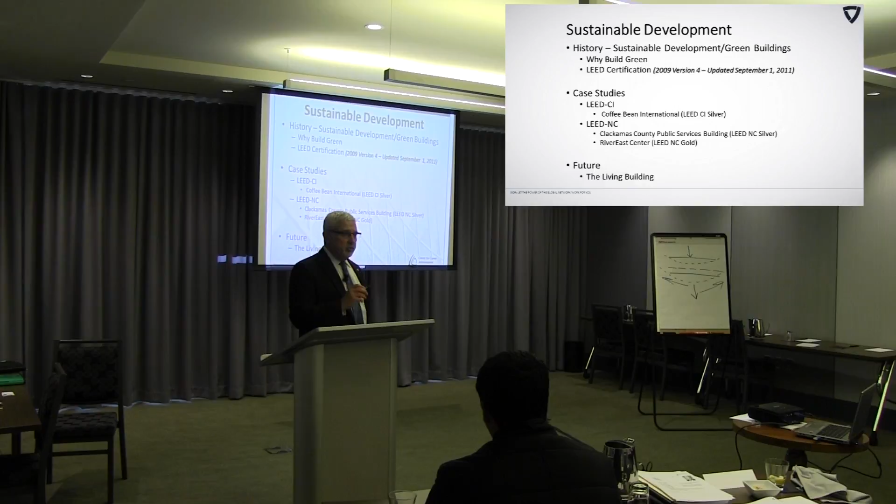So where were you on April 22nd, 1970? When I ask this question, the normal answer is I wasn't born yet. So if you're not sitting in the very last row of this room, just to the right of the doorway... 1970, how many of you were not born? You disgust me. All right, we're done, we're going to go drink now. I was 3 years old. You were 3 years old. Okay, Luis, you're in the club. 1970, yeah, we were almost in college by then.

This is Senator Gaylord Nelson, April 22nd, 1970, giving a speech in Denver, Colorado. What do you think the significance of that date is? Anybody know? The significance of April 22nd... still celebrated today, Earth Day.

Earth Day, so I remember Earth Day when we were kids. Well, I wasn't a real kid in '70, I was almost an adult. And we'd go out and do newspaper drives, can drives, all kinds of things. Earth Day, and the history of that is, there's a little bit of significance, but it was basically the start of the EPA. So in 1970, in December, just 7 months later, the federal government created an agency which still exists today, the EPA, based on the speech and the creation of Earth Day.

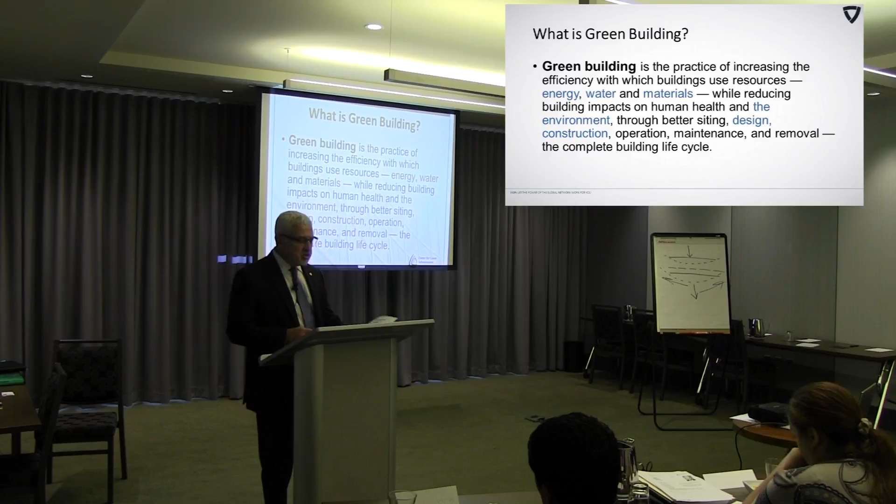Why build green? Well, I think we could answer that easily. Environmental benefits - we want to enhance and protect the biodiversity system, improve air and water quality. I don't think anybody could argue any of these points. Reduce waste and conserve and restore natural resources.

But one thing I think you're going to find is, everybody in the room except Luis raised his or her hand, weren't born in 1970. You're of a generation of a different level of consciousness. I think your generation sees the world from a totally different perspective than my generation, and especially much different than the generation before mine, where the generation before us was the build generation - we're making everything. Our generation has been a little bit more the accumulation generation. Your generation has more tendency to be socially conscious and aware of what the future might hold. For example, making decisions on what you buy based on how it was made. I see that - my children are 25 and 27 years old, and I know they think about things before they just go onto Amazon and buy stuff. It's like, well, where did that come from? How was that made? What's the products that go behind it? How are they polluting the world? But, you know, I never thought of that - I just went down to the store and bought what I wanted.

Economic benefits. Obviously, there's a reduction in operating costs, and creation and expansion of markets for green industry. That's huge. Take LED lighting, for example. Five years ago, was there a market for LED lighting? No, but there's been a demand for more efficient lighting products. LED comes on the market. It's initially more expensive, but it gradually offsets that through energy conservation. You put an LED light bulb in, it lasts as long as fruitcakes.

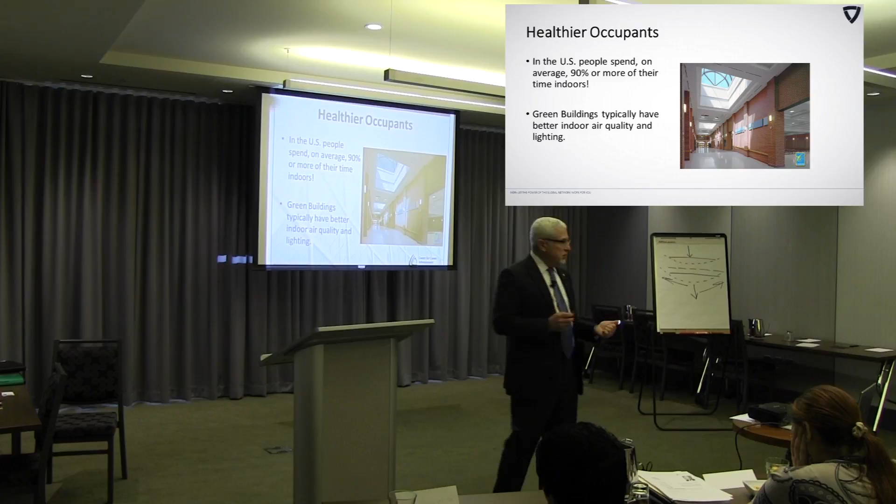Interesting statistic: on average, 90% of the time people spend is indoors in the United States. 90% of our day is inside. Green buildings typically have better indoor air quality and better lighting, creating a better work environment, living environment, a more healthy environment for all of us.

Walmart found that stores with natural lighting, especially skylighting, had a 40% increase in sales over stores that did not. So there's a direct correlation with how you feel to how you spend.

Herman Miller showed that they paid for their daylighting in 2 years through worker effectiveness. They measured the effectiveness of their workers, the production flow, and so forth. Productivity increased enough to offset the cost of improving daylight quality in their manufacturing facilities and their headquarters office. It paid for itself in 2 years.

The Mahone Group said that workers in their call centers process calls 6 to 12% faster when they had a view outside. So in this room, imagine this was your office, and we closed that drape where Bob's sitting, with no connectivity to the outside. Would your productivity be very high on a regular basis? It'd be pretty depressing, wouldn't it? Yeah, I would think so. More so if you had to listen to me every day, dude.

Attract and retain tenants. I think this is a great one. Turnover dropped 50% below the typical level at a PNC by attracting and retaining the employees that work for your company. So a great benefit to a tenant is employee turnover.

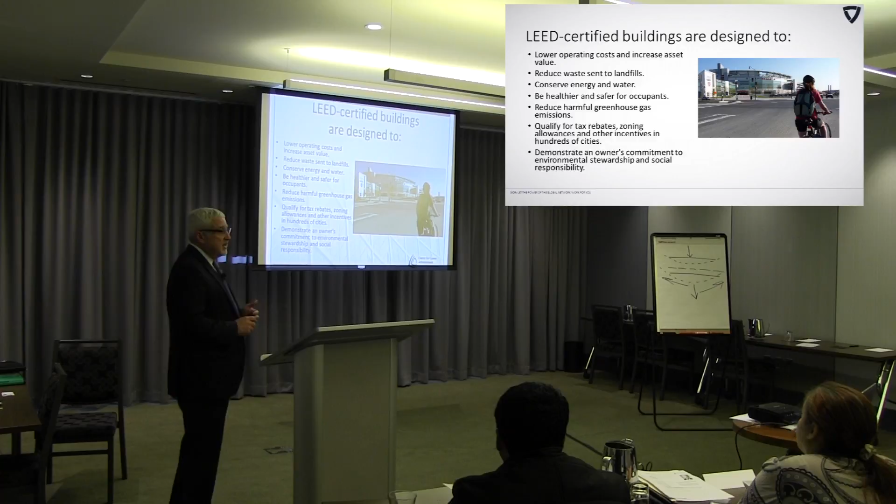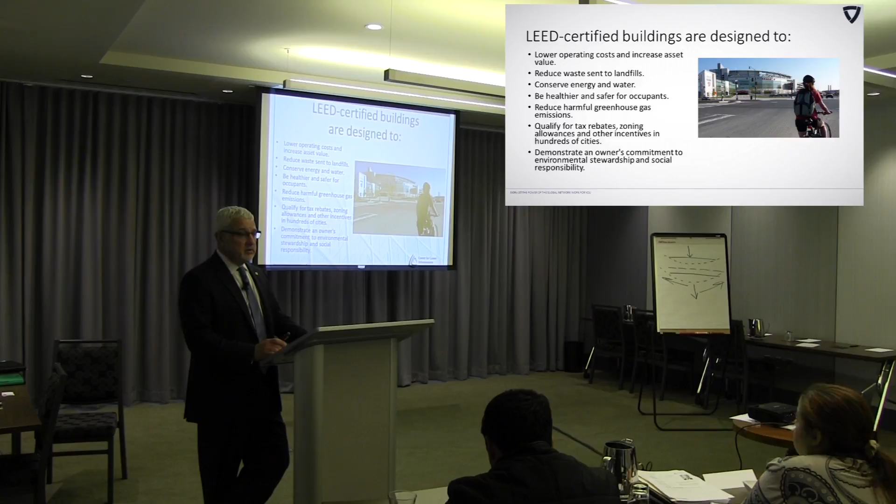Washington D.C. National Stadium - one of the ways you can get LEED points is valet bike parking. So if you ride your bike to a ball game at National Stadium, they have valet bike parking. True story. I don't know what they charge for that, but I'm sure they charge for it. They got LEED certification points for doing that.

People, environment, economics. I want to move forward because I have a couple of things. Creating and preserving value - obviously we talked about that. Lower cap rates, achieving top market rents.

You guys are all brokers, leasing space, representing tenants. Will a tenant in your market pay more for a LEED certified or sustainable building than not? Especially office brokers - Bridget? I don't think in our market, we've had such devastation on the office side, I don't think people really care. But from a cap rate standpoint, yeah, if you lower expenses you increase your NOI.

So you're adding value just by doing it. Will the tenants pay a little bit more? Maybe, I don't know. I'm hearing stories from office brokers around the country that say that if you're not LEED certified, you're probably not going to be able to call yourself Class A.

So all of a sudden your owner is going to go, holy cow, I built this great building but I'm not Class A. I don't know, might be coming. Ryan, did you have a thought? No, they wouldn't pay for it industrial. No, I don't think so. But industrial companies sometimes, like we talked about Honda, love that market differentiation.

So is it about the cost? I don't think so. I think it's about the value.

So I've got a couple of case studies I want to go through, and then we're going to have questions if you have any. And as most classes do by the time we hit 6 o'clock, have none, because you want to go have a party. So that's what we're going to do. But I'm going to go through a couple of quick case studies.

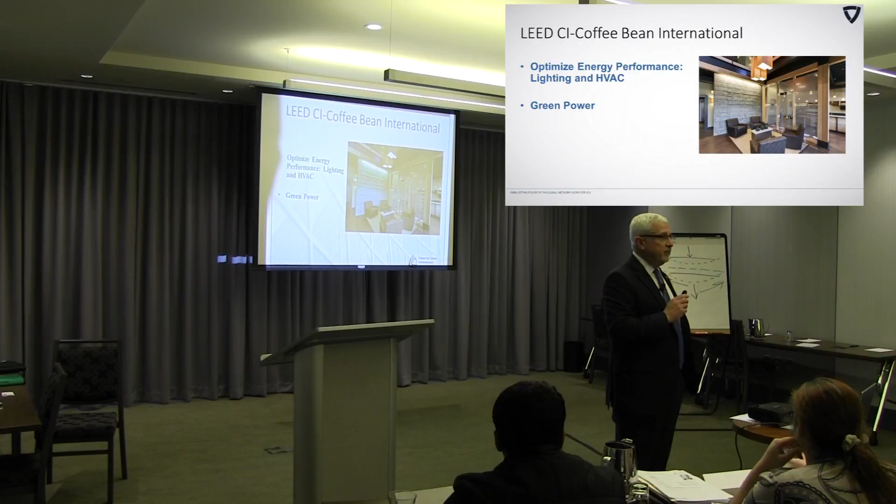Huge points for that. Lighting, obviously, having systems where lighting naturally goes off under a timer or a motion sensor - you walk into the room, lighting goes on, you walk out, a few minutes later the lights go off. Also a sensing system that says when there's a certain amount of natural light coming into the space, a sensor either dims or turns off the interior lighting. It might turn every other fixture off because you have enough natural light to provide the minimum levels you've established.

Building was under a long-term lease.

We had construction waste management - here's another great example of how we can create LEED certification points. What do you do with the waste materials of a project? In this case there was a lot of demolition, so we used the aggregate that was cut up. When we cut new windows in these concrete walls, we ground that up, and that became the aggregate for the concrete we needed to pour back on the site. So it was recycled right back onto the same site.

The office building across the street from my office downtown that's under construction, the 30-story building - the block that building is going up on a few years ago housed 6 different buildings, multi-leveled, everything from 4 to about 8 stories of old poured-in-place concrete type buildings. All that concrete and steel was ground up and is back into the new building now as new material. Pretty cool.

IAQ, we talked about that, indoor air quality. That's a huge factor in creating environmentally positive, desirable spaces for our tenants to occupy. Indoor air quality versus natural ventilation versus mechanical cooling - tremendous opportunity to create points for LEED certification.

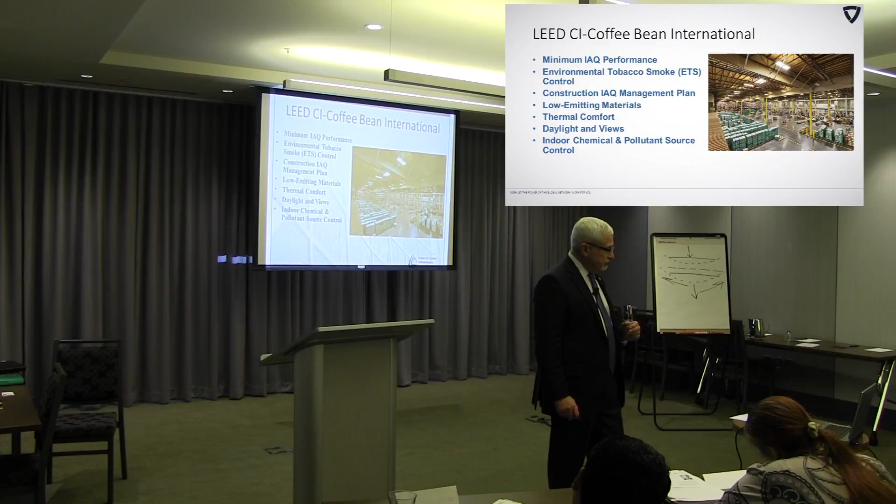We talked about daylighting and views. This next project is the Clackamas County building, and it achieved LEED Silver. This is a government building developed by a private developer, happened to be Greg Speck, the same guy I represented in several projects. This was on a site that was a brownfield.

So we had brownfield redevelopment. Everybody know what a brownfield is? Anybody not? Environmentally contaminated site. So we had to take a site that was basically out of circulation, off the market, go through a remediation plan and figure out what level of work needed to be done to create a buildable site void of environmental contamination. That's a brownfield.

Big points for that because you're taking a site that's basically sitting fallow in your market, doing nothing, not producing revenue, not paying taxes, not creating any environmental contribution whatsoever, and you're returning it back to the world. So you get some points for that.

Alternative transportation. Portland is known as the light rail capital of the world. We have tremendous leadership, I think, in our transportation system. Basically, it's a great opportunity for the homeless to get out of the weather.

It hasn't taken anybody off of our freeways or roads, but I kid, kind of.

Reduce site disturbance. When you're building a project next to an environmentally sensitive area, like a slough, a wetland, or a marshland, instead of coming in with trucks that go everywhere and do whatever they want, you create a plan that minimizes the impact on the surrounding property.

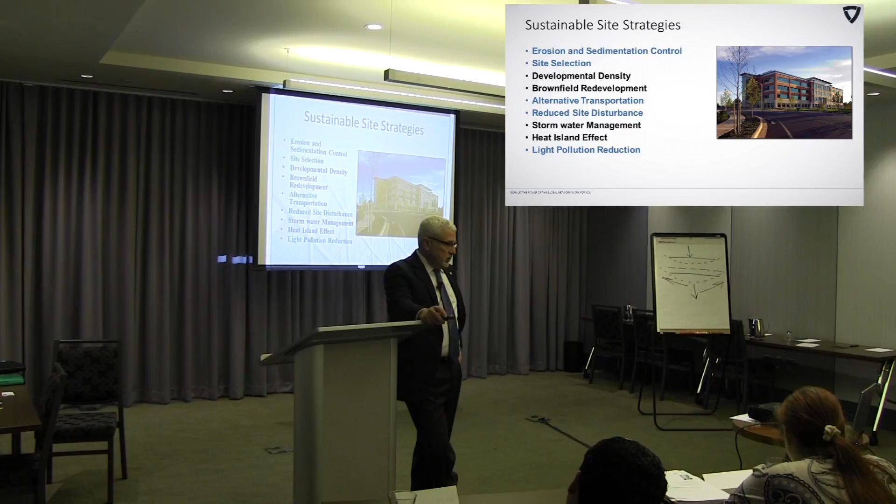In some cases it's positive, in some cases it's negative, and you can control that. If you want to use that heat in a productive manner, you can.

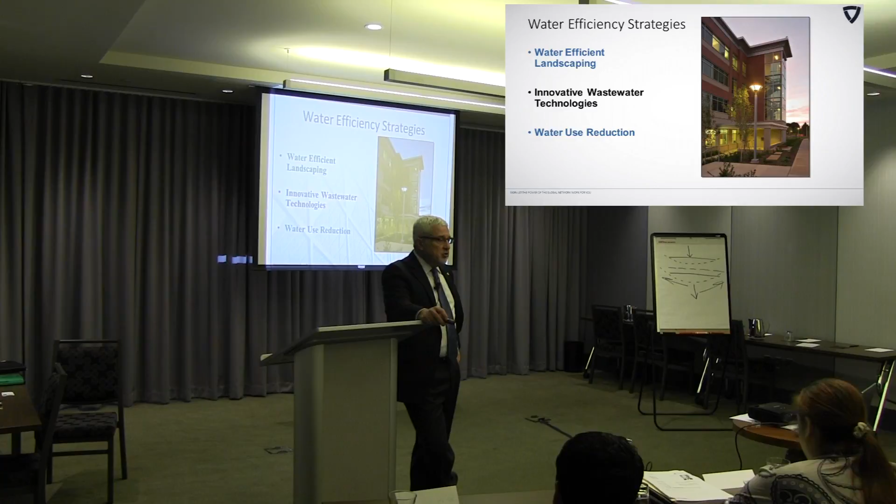Water efficient landscaping. Once again, we create systems that retain the rainwater off of the roofs. It goes into a cistern and is then used to irrigate the landscaping. It can also be used for wastewater. You can use rainwater as gray water.

Energy, natural lighting, fundamental building system commissioning. In this case, you can see we've got some shading devices on the building that reflect the sun at certain angles. We want to maximize penetration during the winter, minimize penetration during the summer. I'm going to show you a really cool example of that in just a few minutes.

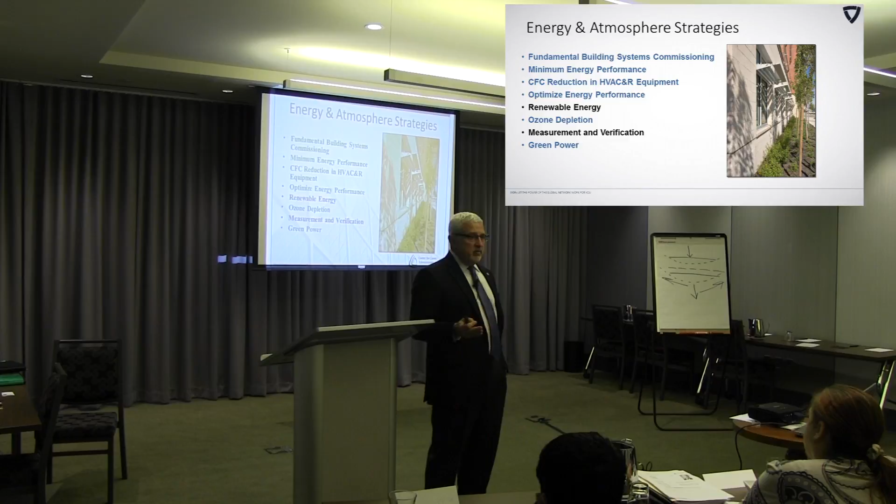Checking a box on your power bill. You ever seen that? You get your statement from your power company that says, would you like to receive green power? Anybody get that? Yeah, for an extra $15. You pay a premium, right? So you pay a premium to help the power companies produce manufacturing facilities, or whatever type of source they can, to get away from environmentally harmful methods of creating electricity.

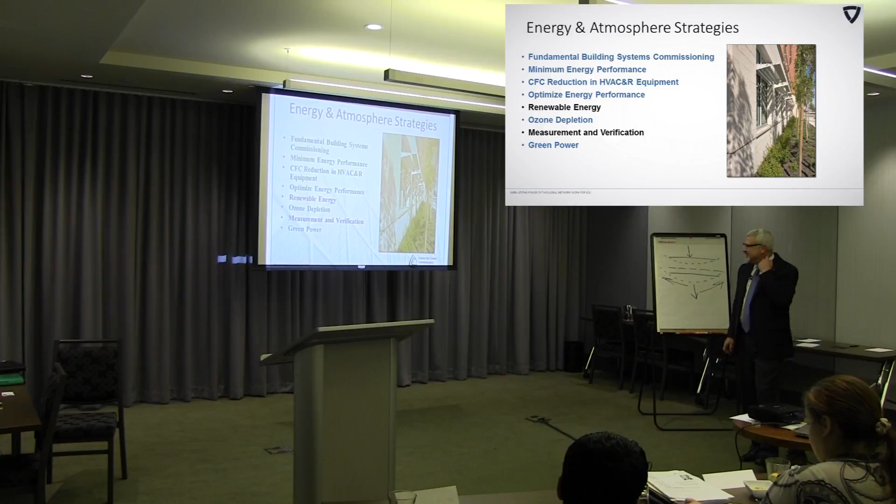Wind, solar, etc. You can check the box. I don't think the wires actually know where the power is coming from that come to your building, but you're helping the power company do that. That's marketing, exactly.

Storage and collection of recyclables, we talked about that. Building reuse.

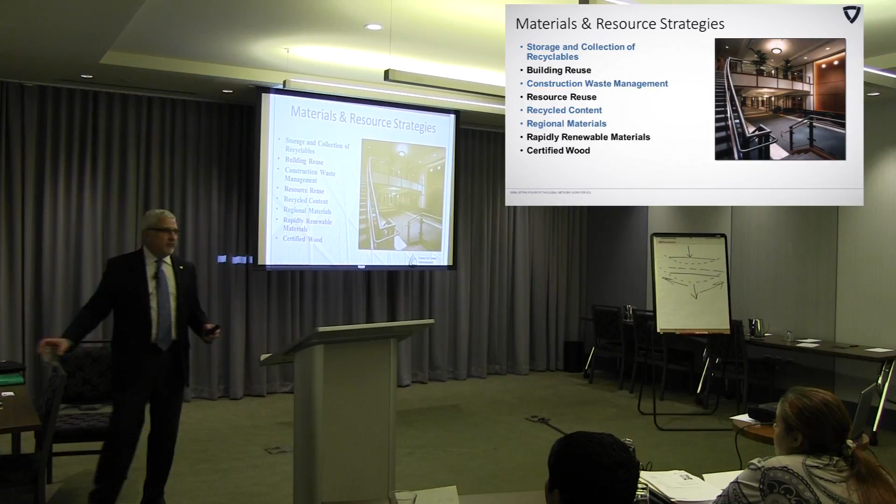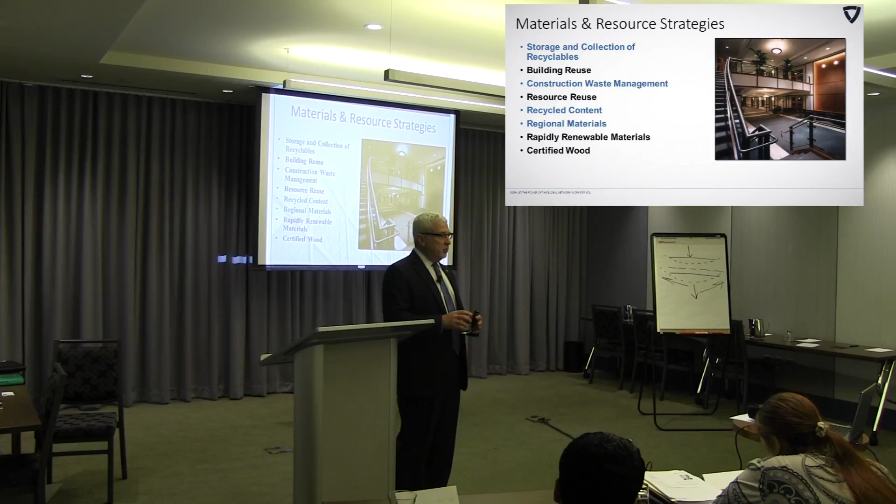We talked about indoor air quality, big event, daylighting. So we had innovative strategies, a LEED accredited professional. One of the things you do to get LEED certification points, which is kind of cool actually, is you develop a documentary film about the project itself that then goes onto a DVD and sits in somebody's drawer for the rest of their life.

But you got LEED certification points for doing it. Not that I'm cynical. So here's what happened on this particular building. This is a financial analysis, speculative, because you're looking into the future of what might happen based on the things you did to the building. The annual baseline energy costs were $190,000.

Annual energy savings by the sustainable methodology we put into this building, we estimate at 35%. So a 5-year savings at that number, 300 grand. Appreciated value based on a 7 cap of that savings. Bridget, we talked about that.

Guess what? You lower your operating costs, you own an office building. Where does that differential go? NOI. Wow. I'm doing an energy efficient building. It's costing me a premium, but I'm increasing my NOI by a 35% margin on operating cost savings. Capitalize that at 7%, I got a $953,000 increased value.

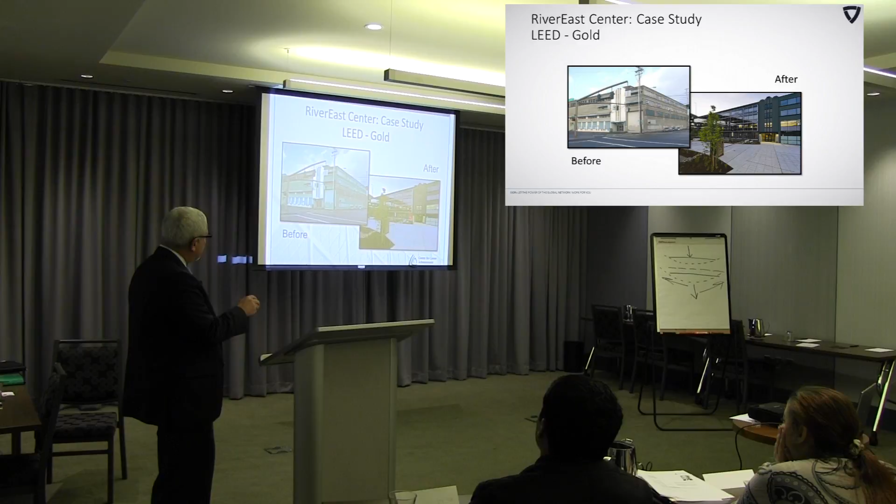This is what it looks like today. This is the same opening right there. This is the entry - they actually replicated some of the same look as the main entry of the building.

So as for sustainable site strategies to build their plan to get LEED certification, here are some of the things they did - obviously using a LEED AP professional. This building, by the way, is owned and occupied by an architectural engineering company, so they were really into this. Not only was this going to be their new home, but this was their showroom for future customers. They had multi-dimensional motives for doing this - these guys were architects by nature and socially conscious, always thinking of ways to improve the environment and build better, more efficient buildings. That's just what they do. But in this case it's also about showing future customers how great they are, so there was market differentiation in making an advertisement out of their own building.

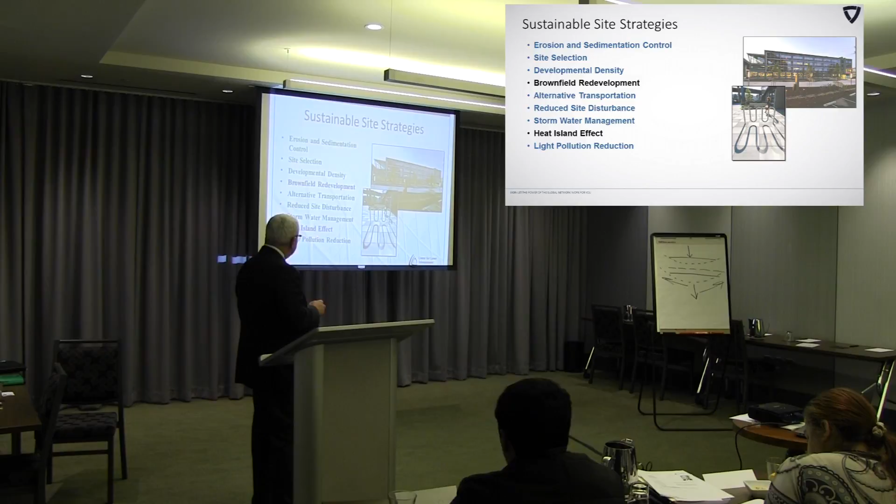Brownfield redevelopment - this is right along the Willamette River, across from downtown Portland, in an old industrial area where there's lots of contamination. We're on a bus line and light rail line in this area, so alternative transportation, stormwater management, heat island effect, and light pollution reduction. You can see bike racking right here.

Here we have an area that's architecturally kind of cool. This is collecting rainwater off the roof and running it down to an area that goes directly into the property's landscape system. So we're taking rainwater, not letting it go into the stormwater system - we're putting it out into the landscape where it will percolate and naturally find its way into the water table.

One of the cool things here is this solar wall. This wall is basically a double layer of glass with shading devices. The sun has different angles depending on the time of year - it's higher in the sky in summer, lower in winter. So we want to maximize penetration when we want natural heating, and minimize it when we want to keep the building cooler. We've designed these shading devices to mostly address the angle of the sun.

The other thing you see in this picture are trees - deciduous trees. Deciduous trees lose their leaves and harvest sunshine. So we're creating shading in the summer with the leaves on the trees, and solar penetration in the winter when the leaves are off. Pretty smart. So here's how this solar wall works.

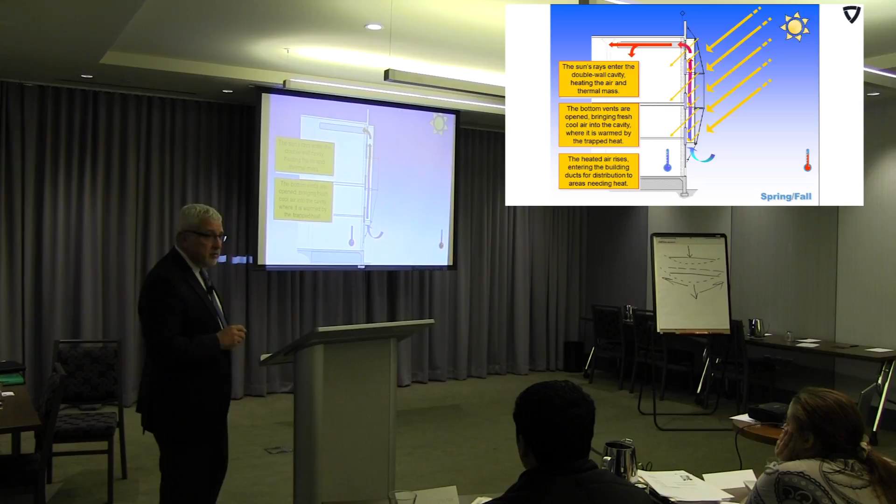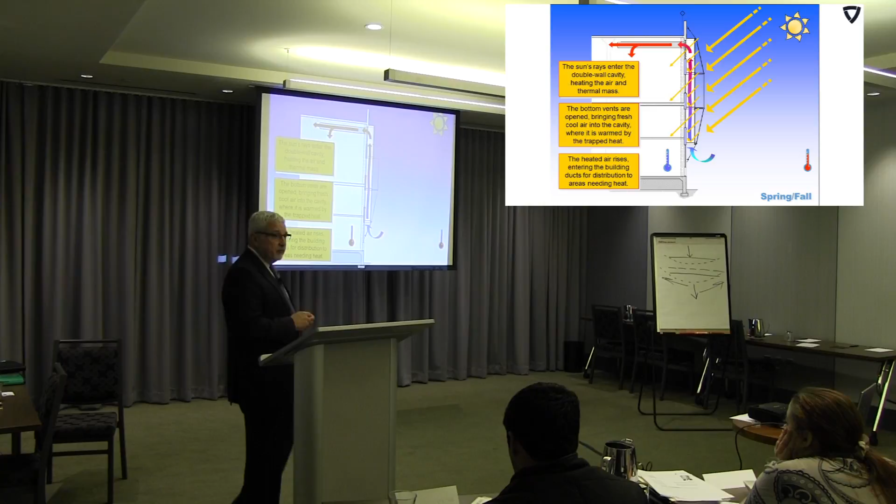...when we're trying to maximize thermal mass heating. The sun's angle is such that we let the sun penetrate, warming up the slab and the wall. The bottom vents - this glass cavity is vented top and bottom. What happens to air when it gets warm? It rises - that's natural convection. We have natural convection going on in this cavity. As the cavity heats up and the surfaces heat up, we open the bottom vent and it sucks fresh air into that vent, and in wintertime we open a vent here and it sends that hot air into the building.

Now for the next condition, when we're trying to keep the building cooler, the angle of the sun's rays are reflected and deflected off the solar shading devices. It does heat up the external wall, so we have a thermal mass where the air is trapped, and we bring fresh air into the cavity. By natural convection, the air rises. We open the vent at the top of the wall, and it sucks air from the building into the cavity and flows out. So you open vents on the north side of the building where there's cooler air, and it creates a negative pressure through this convection wall, sucking air out of the building and creating natural ventilation.

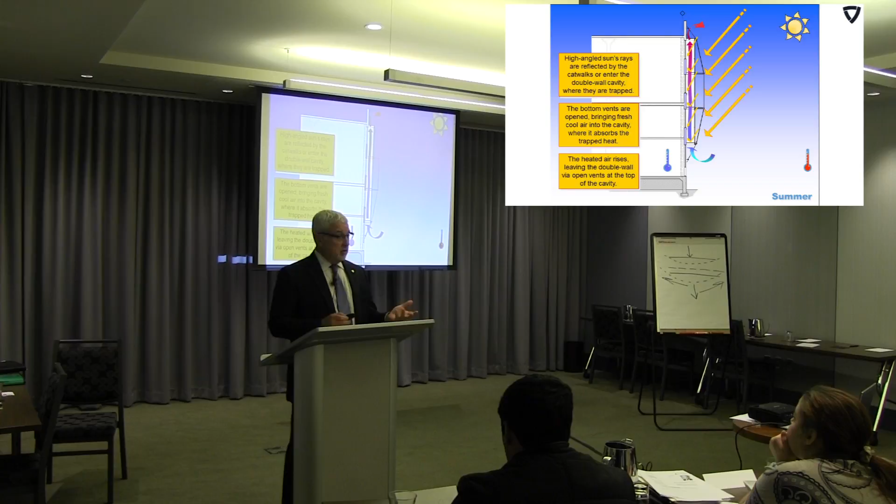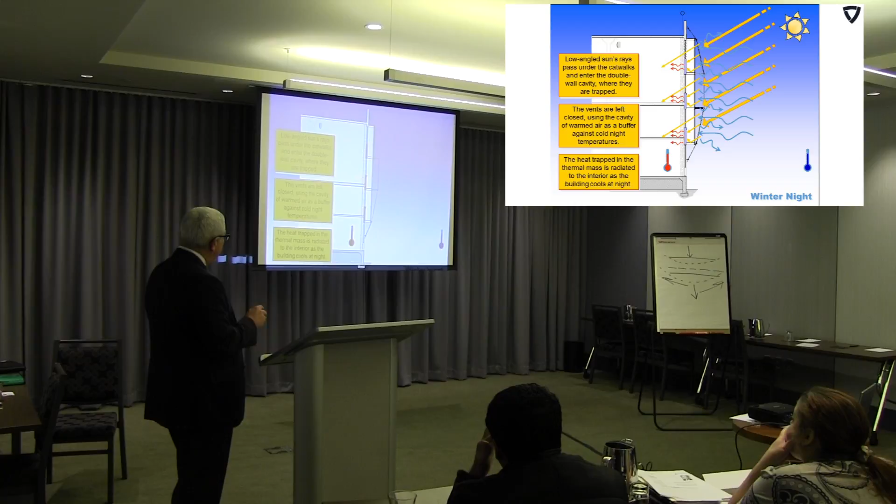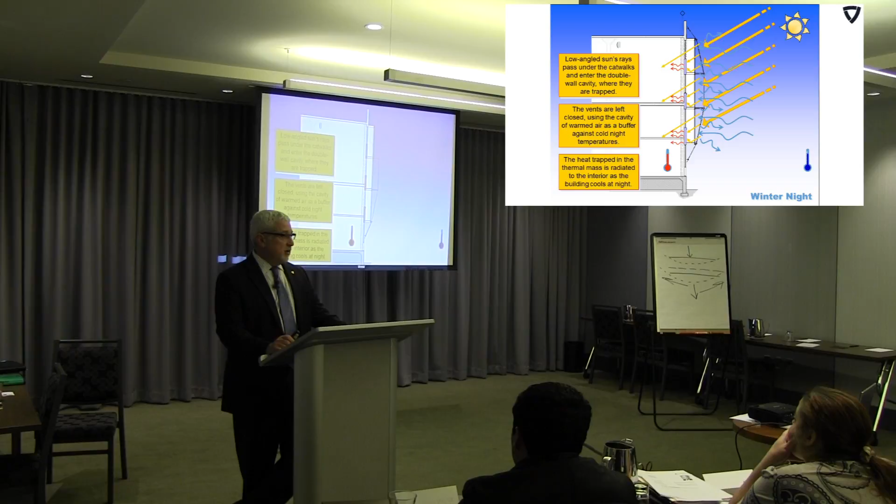And the last one is in the winter, we want to trap air in the cavity. We want to close the vents and let the warm air buffer against the cold night temperatures. These become thermal masses that radiate heat into the building at night, so in the morning when you come in, you don't have to crank the furnace as high and rely on the mechanical system. It's naturally being heated by the radiation from the thermal mass.

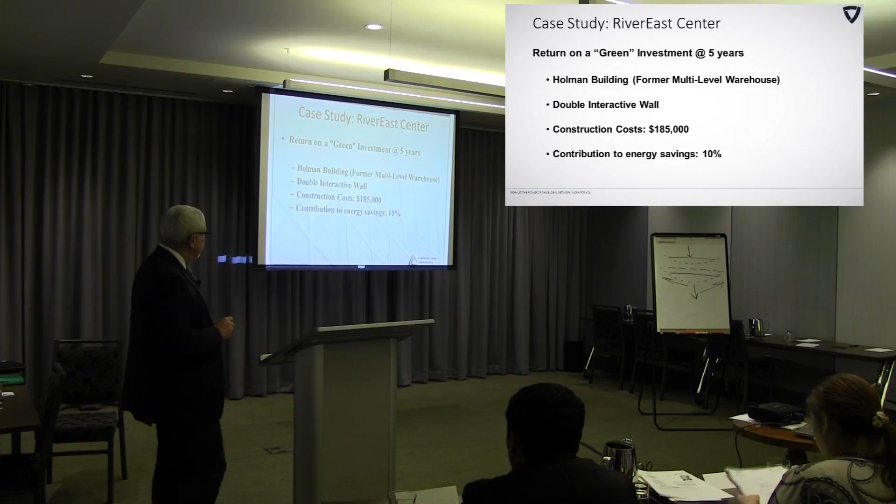So let me get to the financial analysis on that real quick. The construction cost of that wall was $185,000, and we assumed it would contribute about 10% to the overall energy savings of the building. Here's our annual baseline cost, once again about $1.75, 10% of that.

Here's our 5-year energy savings, appreciated at a 7 cap, $262,000. Here's our cost, here's our savings, here's our increased value, net value gained, 91.9% over 5 years, or an 18.4% return. I'm going through that quickly, but the math is accurate.

It's proven to be an incredible feature for this building, and the architectural engineering firm, the people who work there, love it. It's just cool space, and it's different. It's unique. It's a conversation piece as well as an energy-efficient solution in design.

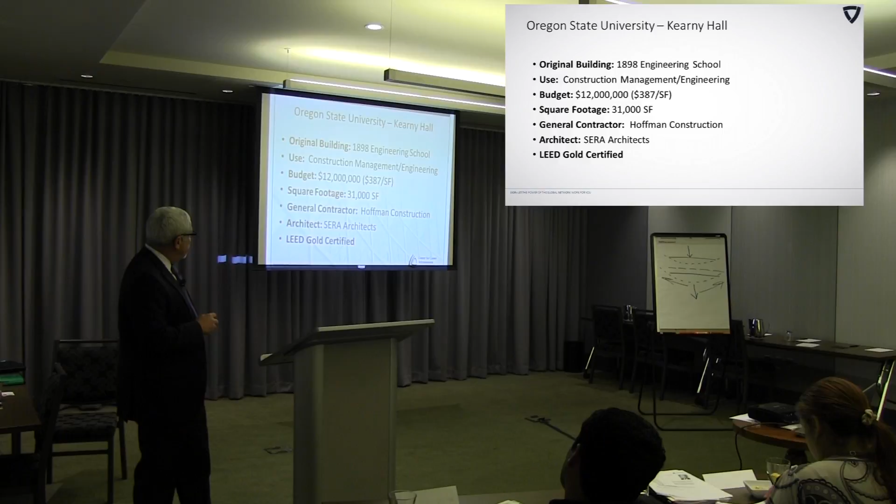This was an old building at Oregon State University for the engineering department. They had a budget of $12 million to renovate this entire building, 31,000 square feet, with complete demolition of the interior to create an environmentally sustainable building and seismic upgrades to allow continued occupancy.

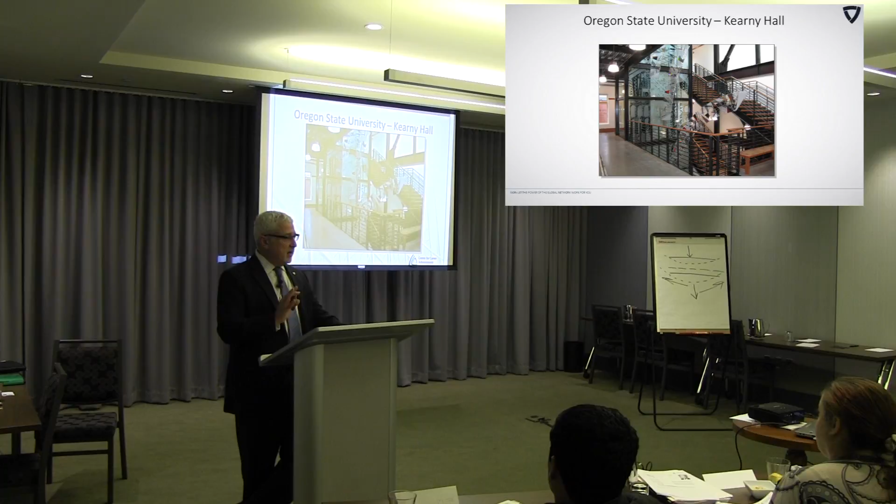Sensor controls save about 30% of energy—rooms that aren't occupied, systems go off, and come on when you walk into the room. 75% of the construction debris was targeted for recycling back into the project. Sustainably harvested wood, operable windows, air quality improved by minimizing VOCs, which come out of tiles depending on materials used for flooring and wall coverings. It eliminates VOC penetration of the building.

Here's what it looks like now. The renovated structure is a teaching tool for students. It's really a cool study—the bones of the structure and the bones of the mechanical systems are visible.

This is just a real quick time lapse, if it will work. Sometimes it works, sometimes it doesn't. This time it looks like it's not going to work, which is fine since we're close to the end anyway. But it's basically a cool time lapse of the total demolition of the interior and then the rebuilding of the building.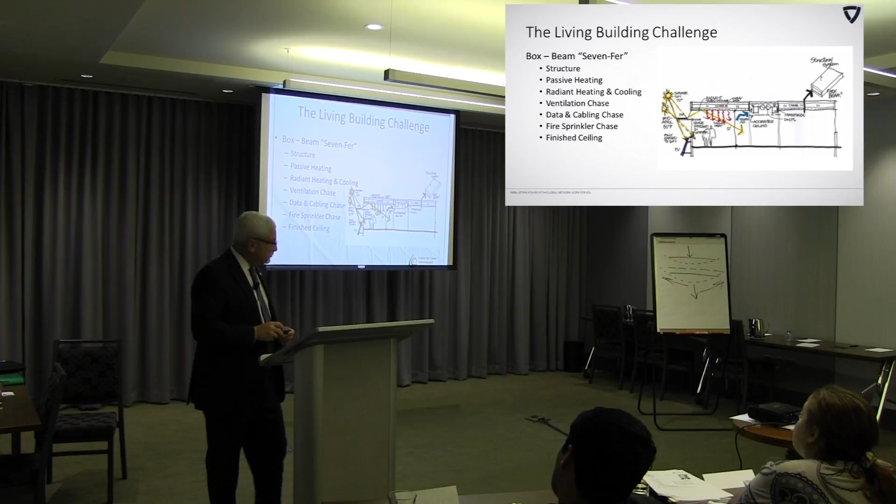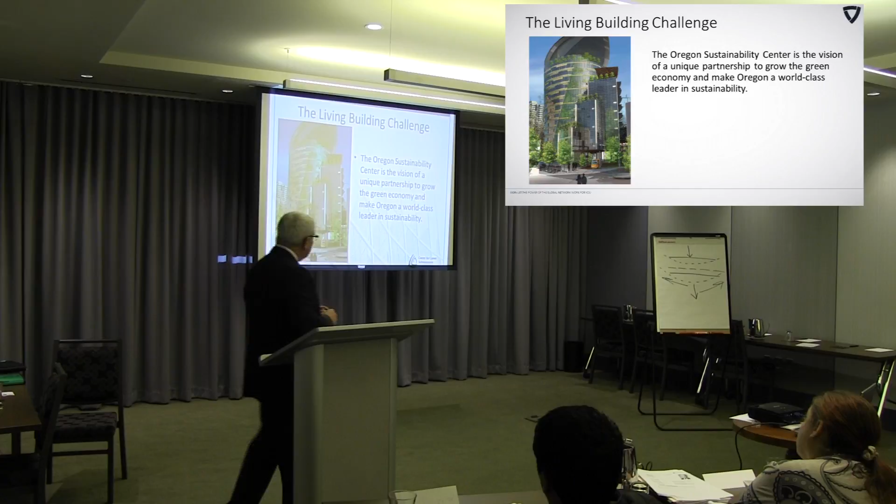Gathering rainwater—this is a graphic model of the Oregon Sustainability Center, which is going to pursue the Green Living Building Challenge, net zero from day one, from construction through occupancy, with zero impact, a carbon neutral building on the environment. We'll see if that happens.